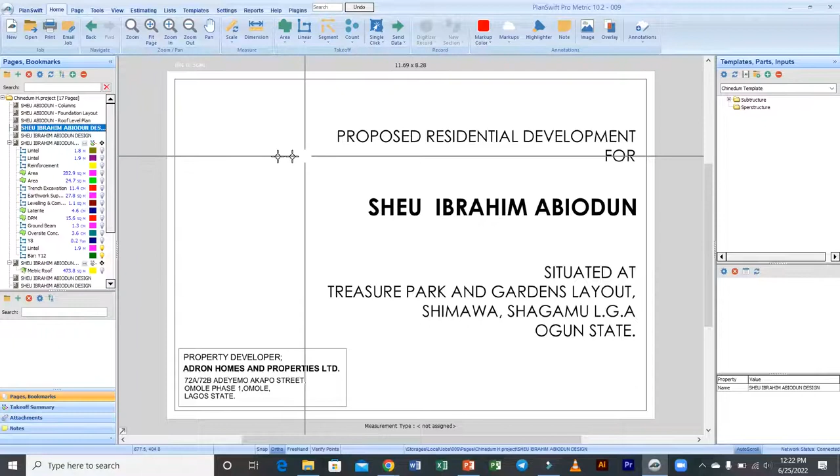This is the interface of the software we're talking about, PlanSwift. If you've used other software, even Microsoft Office, most packages look almost the same. You always have your icon for the software, then home, page, and other tools on the menu bar. I'll explain a few of them and what you can use them for. Since this is the introductory part of the class, I won't go deep into the advanced course.

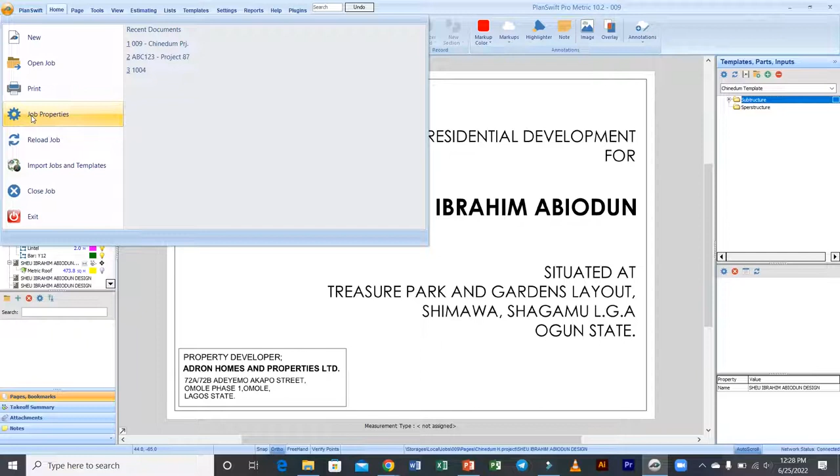So you have Open Job on it. You can print directly if your laptop is plugged into your printer, and you can do some kind of adjustments to your job or to your pages - all of these we're going to go through. We have Reload, we have Close, we have Import Jobs and Templates, and then Exit. We will be playing around with all of these tools in a bit.

Then we'll have PlanSwift. If you want to read anything about PlanSwift, you might not really be interested in this page, but if you want to read anything about the software, this is a page you can come into to see what PlanSwift can do for you and how to do some things. It's saying on this page that Windows 11 remains unsupported for now.

I was actually using Windows 11 on my laptop initially before I had to change it to Windows 10 because Plan Swift was not being supported. So for now, if you have Windows 11, it might be a constraint. I advise from Windows 10 down, you can use Plan Swift very efficiently.

On our home tab on the menu bar, you will have this interface. Each tab you click on the menu bar has other items or tools under them that you can use to work. We'll be basing most of our measurement and taking off on this home bar, relying on it to take measurement of any form.

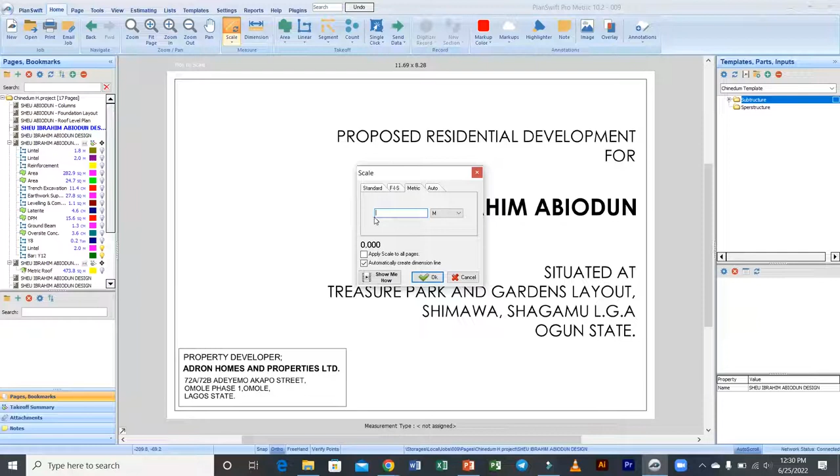Let me show us something briefly. For example, just a minute, okay. I think some persons are on the waiting room. Right? Okay, you'll be allowed in a bit. All right, so let me do something quickly so that we understand what I'm talking about. On this view, let me just say anything. Okay, before I explain what I'm doing, please just...

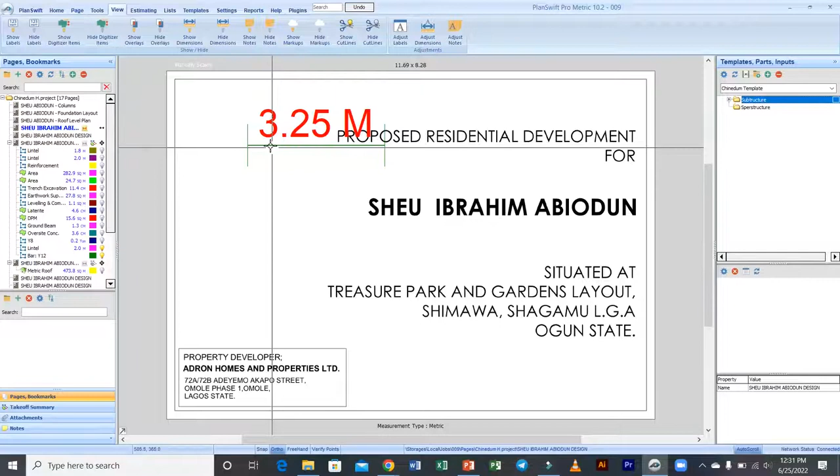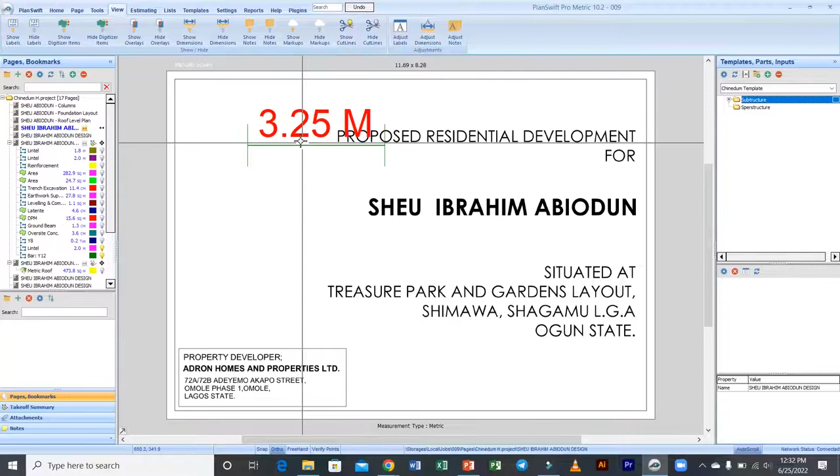Okay, so sometimes you might be taking your measurement. I am on the view tab, please. I wanted to explain something using that view tab. Sometimes you can be on the interface or in a particular drawing and you have measured a lot of things - your lintel, your floor plan, your ties, your wall area for finishings - and everywhere is occupied, and you are being distracted by so many dimensions. So what you can do is use this view tab to get rid of all of these things, but I'll explain that in detail. Please just give me time to explain some of the other things.

All right, we have the estimating tab. So any kind of work you are doing on the home tab comes up in this form. You can see that this estimating tab has our work arranged in a BOQ format. If you look at this place, you have the names of what I have actually done. There is a way I was building, I will explain that when we get to that end, but I just want us to know that yes, on this estimating tab, you can arrange it to be as your BOQ. Or if you want to have it from your report end, there is the report tab.

You can also have them in this form. And if you want to have it on your Excel, there's a place where you can export, a place where you can send in data. Maybe what you want to measure, for example, let's say your skirting, is the only thing you omitted while taking measurement. You can actually measure your skirting from this software and send in data, and then it will reflect on the column of your Excel where it is supposed to be. So this software has the capability of doing that. All right, so again, we have the list - you might not have much thing to do here.

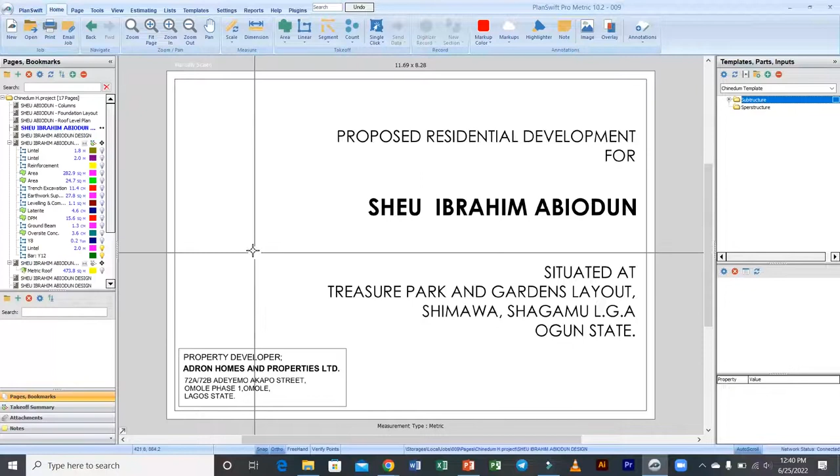So all of that has been incorporated in this software, and you can make adjustments to it. We have your reports for every kind of measurement you are doing. This software accumulates them in a particular place in the form of PDF, so you can export this one. I'll be explaining this also very soon.

Then you have your help button. You might not have much to do there, but for those of us that have installed the PlanSwift software within the week, you will know this is a cracked version. So even if you lose anything, maybe you format your laptop, you can install this software again because it's a cracked version.

As far as you have the correct specs for your laptop, the software will run smoothly on it. The first time I started using this software, I was using a mini laptop, and you know what that can be like, but it was still able to run this software, and I could measure very efficiently on it.

Then we have different plugins. So many of us have always heard about plugins. These are generated or built-in templates that one can use in conjunction with the software. You might have heard about the ADLM plugin. You can use some of these plugins, install them and use them with the software.

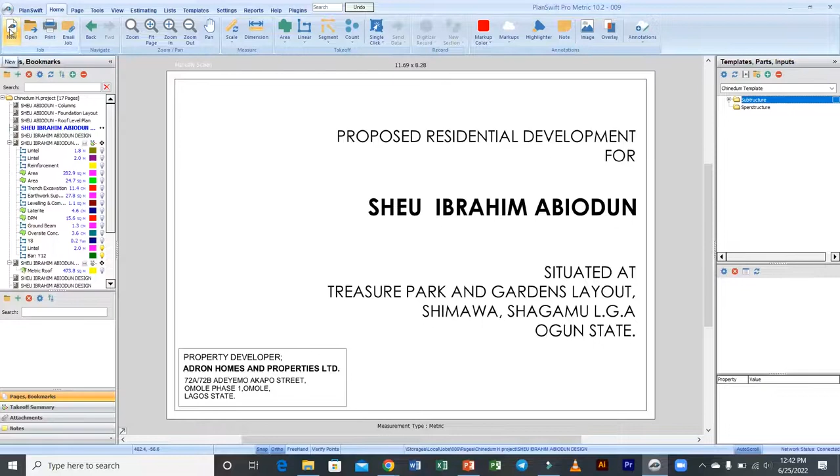Once I click on that, you're going to have this prompt or window asking you the job number or the code. You can name it anything. For example, let me name it ABC123. You can name it anything.

Then the description. For example, let me say I'm taking off for Mr. Kelvin. I don't know if anyone named Kelvin is with us in this call. Okay, Mr. Kelvin. Oh, better still, proposed development for Mr. Kelvin.

So this is the name of the job. You can name yours anything, you know the name of your own drawing. Then if you want to write any notes, that is up to you. Then leave it on local. Leave your new job location on local, meaning you're storing it on your laptop through this software.

Another thing I want to tell you is that anything you are doing on this software is automatically saved. You don't need to press any control key, it's taking care of everything you're doing. It will save your job, even work you did in the past two years, it will still retain those works for you.

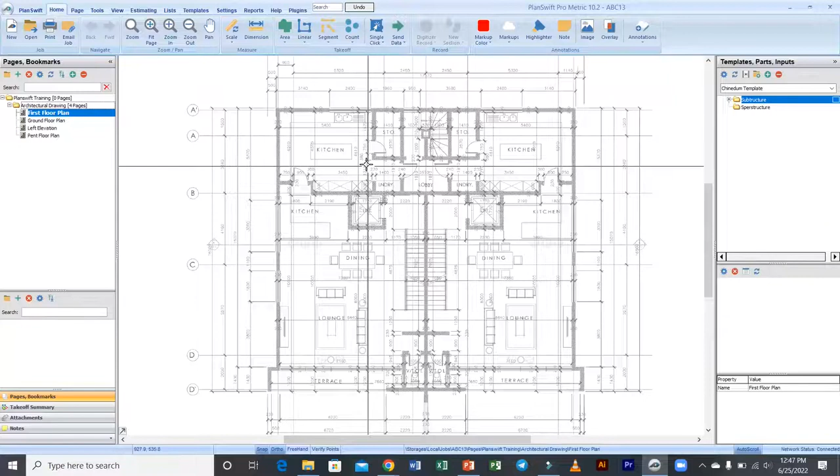Okay, so this drawing is not really clear, this was scanned. Let me use another drawing. Just a minute.

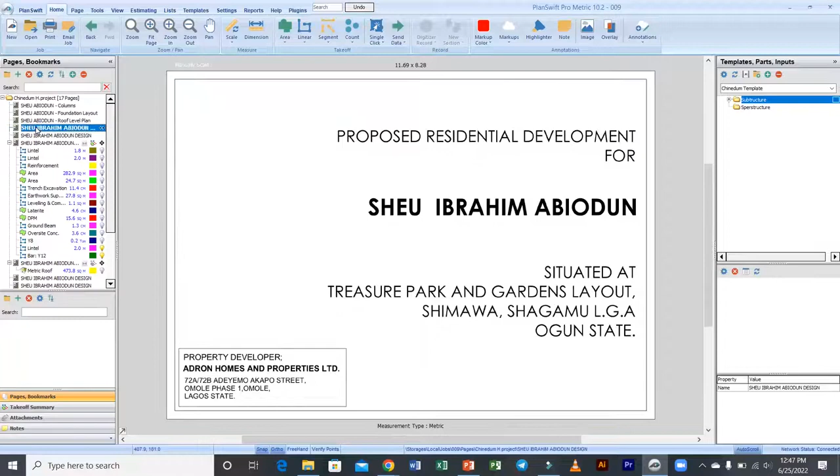Okay, this drawing is clearer. All right, yes, I think we can all see this. So I will use this particular drawing to explain most of the things I want to explain.

So I have been able to upload a drawing on this software, and this is a very good way to do that. So I believe we already know how to do that.

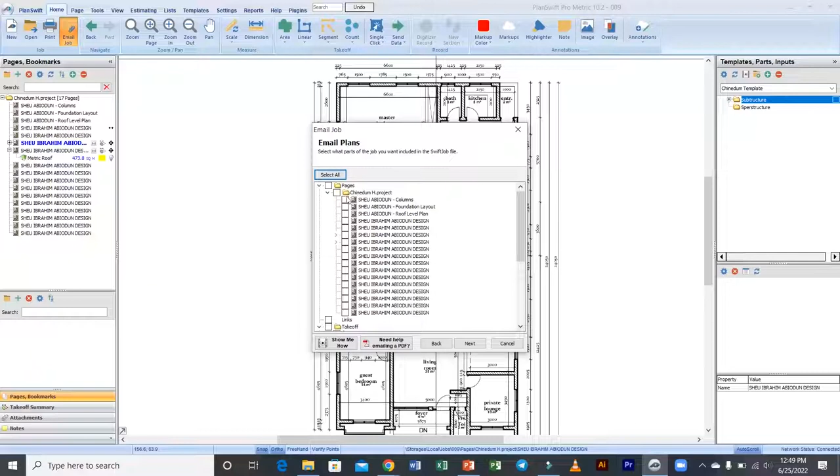So if you click next, it will ask you to click to select the page that you want to send to that person. This is, I'm on my email job toolbar, please.

All right, so you can now write your name, the referral number if you want to do that, then your email address. If you're working in an office and need many persons to see that particular mail and make adjustments, or give their own view on anything you are doing, you can add as many emails as you want and send it.

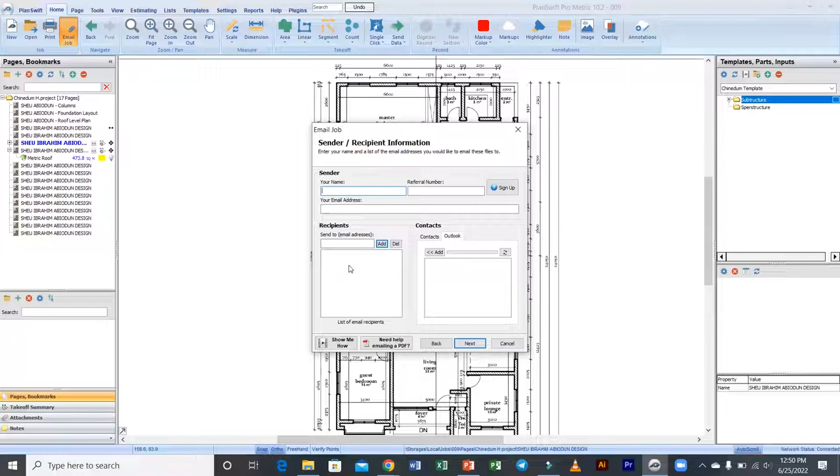So let me close that. Again, we have back, I will explain that in a bit. I will use this very button to explain something. So we have our navigation tool, from this side to this place.

So you can see we have zoom, and this is how you can use zoom. Once you click on zoom, you will see there is this mirror kind of image saying draw zoom box. So if the particular place you want to zoom in or get the details very well is on this master bedroom, from what you can see...

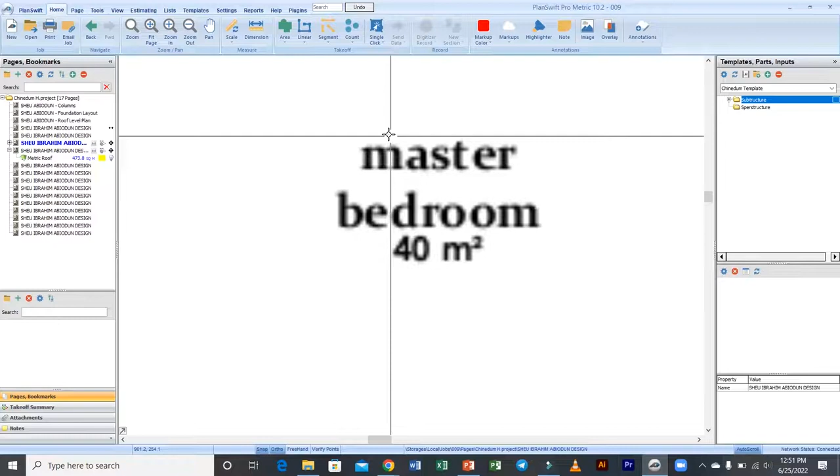Then what you can do is, without using your scroll button - also those are shortcuts, and I will also be telling us about other shortcuts you can use in the course of your measurement - you can actually click, and this is the room you want to zoom. You see that? So you've been able to zoom into this page, but that's not what we want.

So you can click on fit to page to be able to have your default page. Then you can zoom in, you can zoom out, you can pan. Pan is just like holding - this is what is called pan. You can hold your scroll wheel on your mouse and be able to do that also. So if you can't use this one, you can always use your scroll button if you are using an external mouse, right?

So we have the scale and the dimension. This is one of the most important things that you have to know.

If you look at this place, you see that this drawing has been manually scaled. I don't know if you can see that, but this drawing has been manually scaled. All right, so manually scaled.

Before you're able to take measurements of any kind of drawing, you must scale that drawing, or calibrate the drawing, let me use that word too, so we understand it better. You will always calibrate each of the pages you want to work on. But if you've checked your drawing and your details on those pages, and you see that all the drawings are of the same scale, then you can just do one scale and it will work for all the pages.

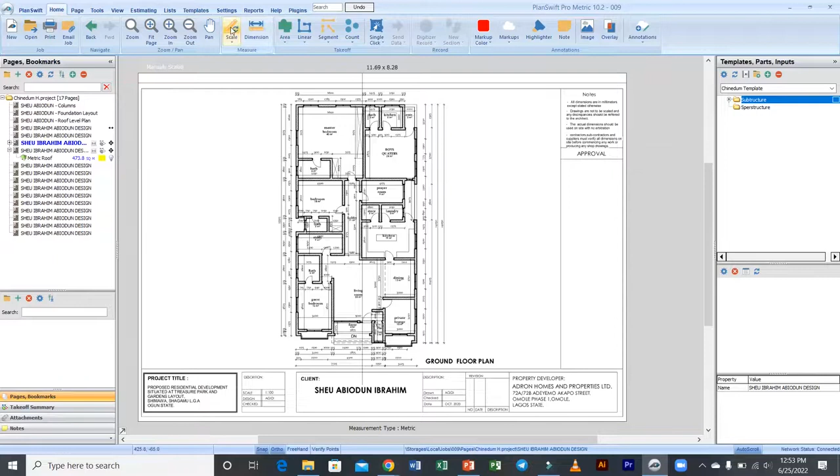But if the drawing, for example, is a photocopy, or sent from a phone to the software, most times it tends to shrink the drawing. For example, any drawing on A4 paper or A3 paper can actually be compressed. So when you bring such drawings, the software has the ability to recognize that changes have been made to this drawing, so you can manually scale it, and I'll show that too so we can see how to do each of these two scaling options.

Then we have the dimension button. Maybe there's a particular place that's not showing very well, so you can click on the dimension button and give it a dimension. For example, let me just use this one as an example, so you can actually do your dimensioning, and then also get rid of it. For now we're not using it, so let me get rid of that.

Now this is where I need you to pay very much attention, please. In these our professions, the truth is that we have different units of measurement. Let me call it units of measurement. Of course we have units of measurement. You have the linear measurement, those are your meter, your millimeter, and the rest of them.

For example, you are taking measurement of your skirting, you want to do anything as it relates to skirting. Whatever you're going to measure is going to be in linear meter.

Another unit we use is our superficial item. We have items that come in superficial form, or area form, let me use that word. So either you call it square measurement or superficial measurement. This superficial measurement is about your area measurement.

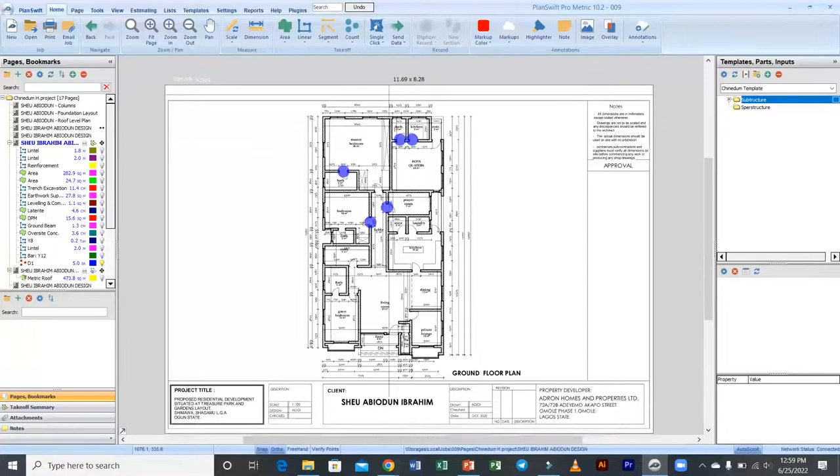So whether the architects have given you a schedule for the door and window, there is a way you can actually do this, and it will be much easier with the use of this software. You don't even need to ask any person any question. So that is how the count tool works. I want to take this off a bit and explain other things.

All right, there's single click. There are ways of using this single click. For example, you have an irregular shape. Some buildings can have not just regular shapes, but there are buildings that come in the form of irregular shapes, and it might be difficult for you to take the area measurement or any form of measurement. So this single click has been built in a way that you can click once on that particular place, and it takes the measurement for the whole of that area.

But it has advantages and disadvantages. One of the disadvantages is that most architectural drawings you will see are very neat, clean, but there are some that come in a form where you have furniture layout everywhere. For those that come with furniture layout, you might be constrained from using this single click, because what it does is recognize anywhere you have a boundary to that drawing. If you have furniture, it will divide it into places. Maybe I'll find a drawing to explain that single click very well.

Then sending data, you can send your data to Excel, just like I explained before. You are measuring maybe your beam, there's this beam you omitted in the course of your measurement or taking off, so you can easily send in the data from this end.

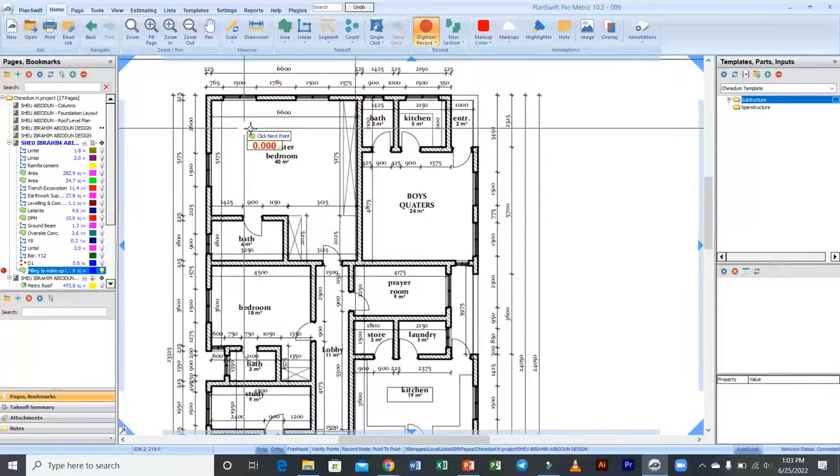For example, I want to take the measurement of filling to makeup level using this laterite for this particular master bedroom. I can always click. This is not really what I want to explain, but I just want to use this to demonstrate before we go into real measurement.

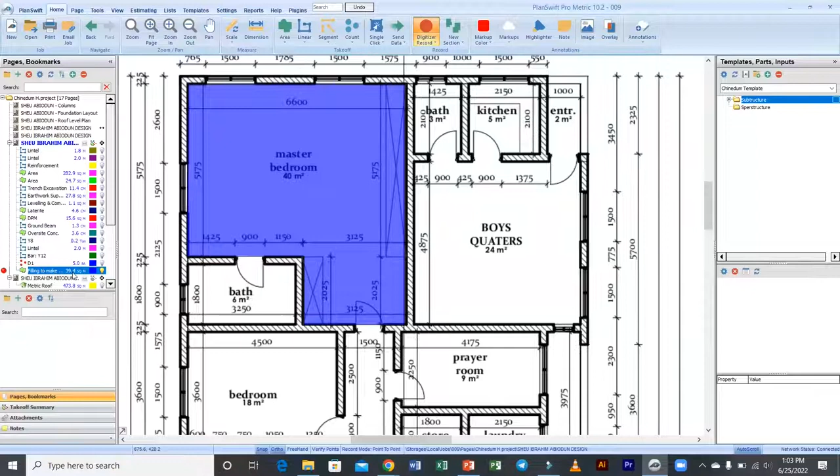Once you click on the last point, you can double click to exit, and at this point you see at the left side of our window we now have filling to makeup level, and it's 39.4 square meter. Once you're done with your measurement, right click and stop.

But the question is this: sometimes we are taking measurement and discover that, for example in screeding, the thickness of our screeding or tiles differs in our wet and dry areas. Our wet areas are places like the kitchen, the bath, the WC areas and all of that. But your dry areas are every other place where you're not using water frequently. So in this kind of situation, you want to differentiate them.

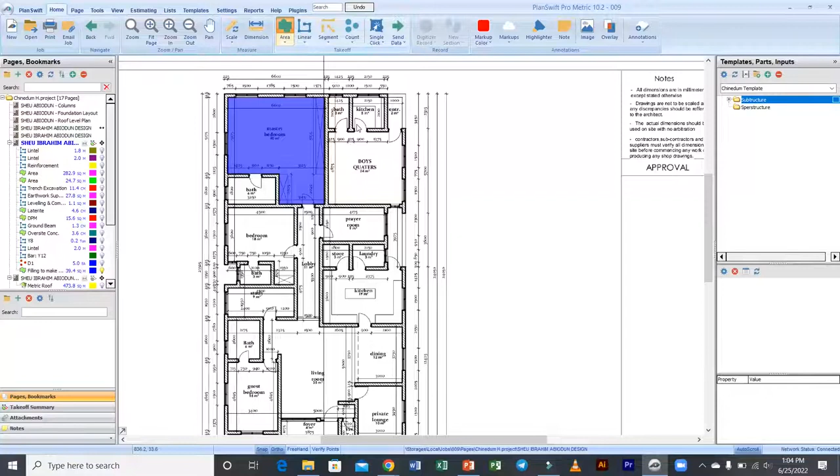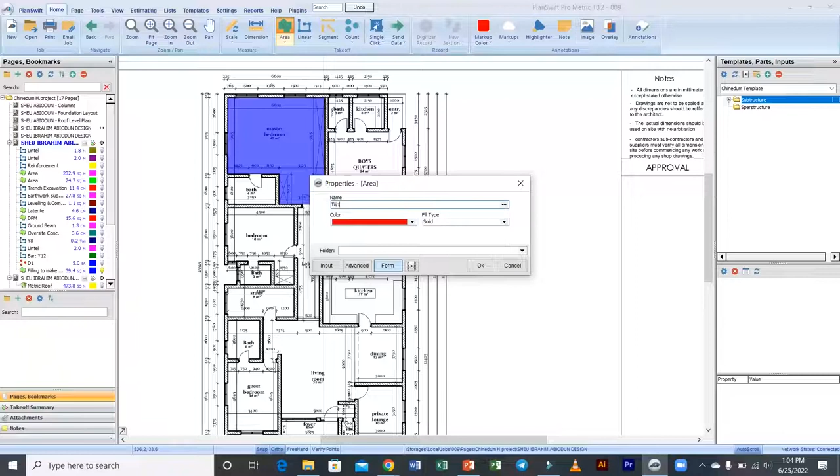If I click on the area again to differentiate that this place is not going to be tiled with, let's say, a vitrified tile, then I differentiate with another color. You can change it again, like I said, to red, to show that you want to measure tiling. So this place is not going to be tiled with the same type of tile as this master bedroom. This place is going to be different.

There's this shortcut I want to use, I'll also be explaining that. There's a place where you can actually magnify and see what you're doing, so you can magnify and see the point at which you are clicking. I'll be explaining all of these.

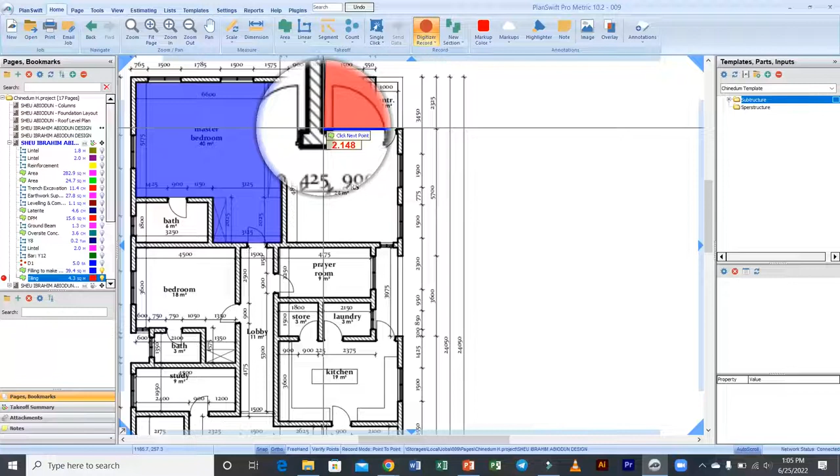Once you click on the last point, you double click. So this place is now 4.3 square meter. That is what you can use. I was trying to explain the digitizer, you can use the area tool to achieve this with the digitizer. That's that for now, I really don't want this.

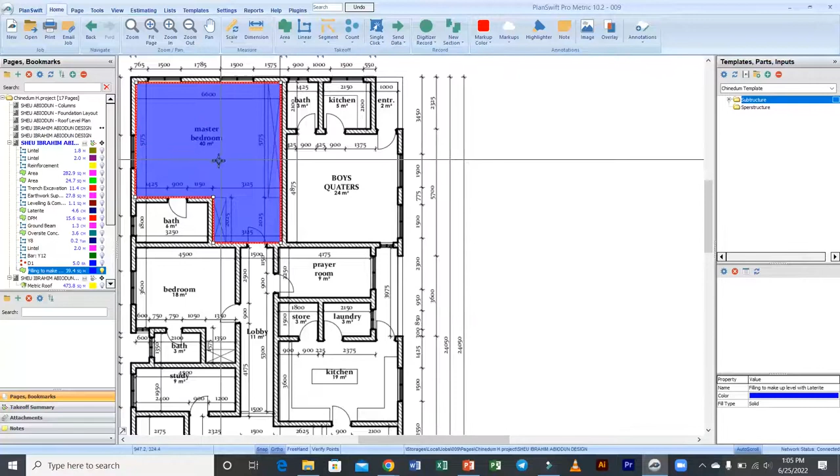Another thing is that you can hover around your measured item to see your measurement. Once you click and come around this place, you can have your measurement. It says filling to makeup level, and there are ways you can manipulate this software to work for you in an easier way.

That is it on our digitizer record, new section, I will explain this new section in a bit. For example, if you're measuring any item of work and want to continue with the same kind of measurement, this place is to be tiled with vitrified tile like I mentioned before. This other place is vitrified too, but you forgot that.

Then you can use new section to continue from here, or you can come to this place and click this. You can see there's a little circular greenish circle around this place, that is the digitizer also. You can click on it to activate it and continue your measurement. We have your markup color for everything you're doing, you can change the color from here. Then you have other markups.

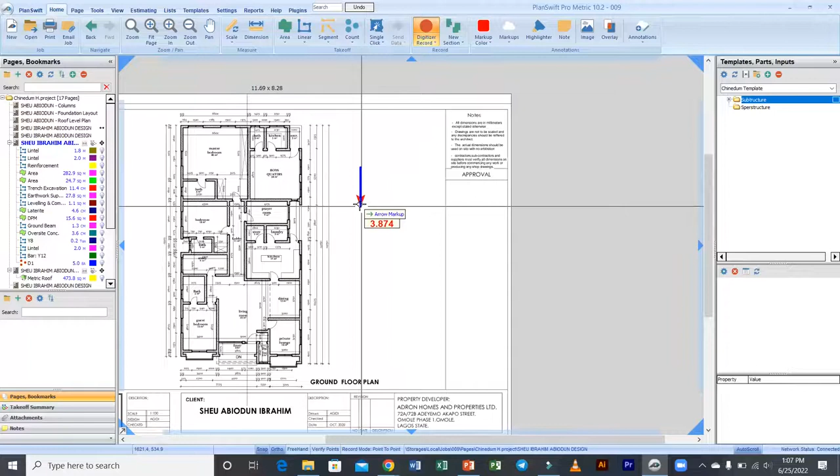I click here to show somebody that this drawing is going towards this side, or towards this side, or maybe this way. So once I click, you can see that the arrow is now showing me that I should look at this place to see every other note that is on this side. So you can always make all of these adjustments.

I just use this one, and then you can highlight some things. You are doing a particular work, and then you discover that maybe in a room there is something you needed to tell somebody when you get back to, so you can close your job, and when you get back to it, you can show the person what you have highlighted. For example, you can use box highlight, maybe leave it this way. I've highlighted this particular room, so that is what you can use this highlight tool to do. That is it on the highlight tool.

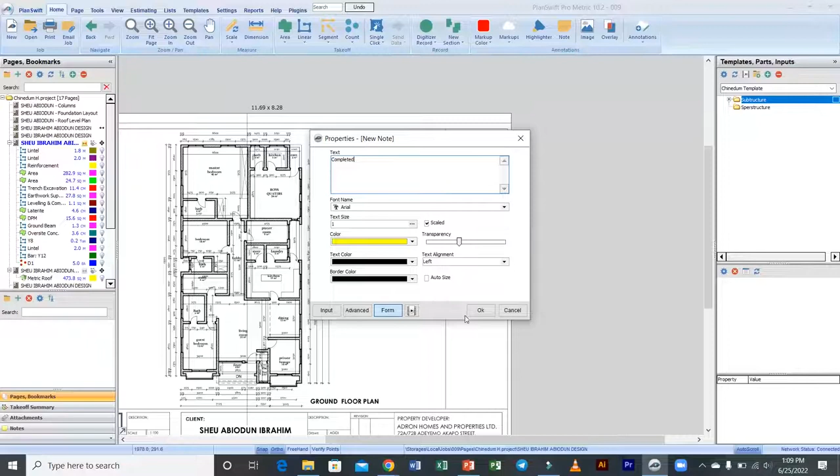Then you can use note also, to show that there's something actually happening on this particular area of my measurement. Once you do that, your drawing is going to be neat and clearer for someone who was not there when you did the measurement to understand what you did. For example, what do I want to write there? Completed, for example. I'll click OK. So I have completed.

So let me adjust. So now I have this. These are the things you can actually do with this software.

Then we'll have image. If you want to upload an image, you have overlay. Let me explain what this overlay can do for you.

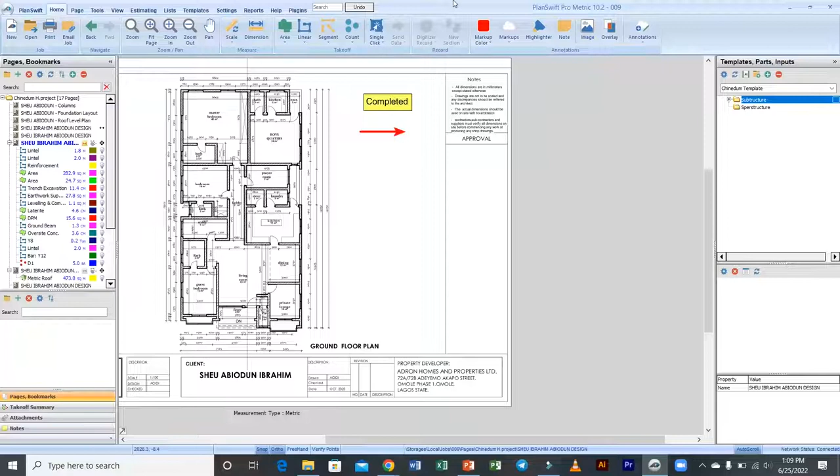Sometimes we are all human beings, and we are bound to make mistakes most times, and an architect is a human being too. So if an architect has made a particular mistake that affected the project, and you are expecting the architect to give you feedback on the adjustment, you send back this drawing again, and the architect has been able to work on it and send back the drawing, and you want to see the difference between the two. You want to compare the two drawings and see the adjustment that you've made. What are the differences between these two things? Maybe this rectangular living room is now circular, or maybe it has been made into a square. You will be able to see that this software can recognize that yes, there is something actually that has been adjusted in this particular place.

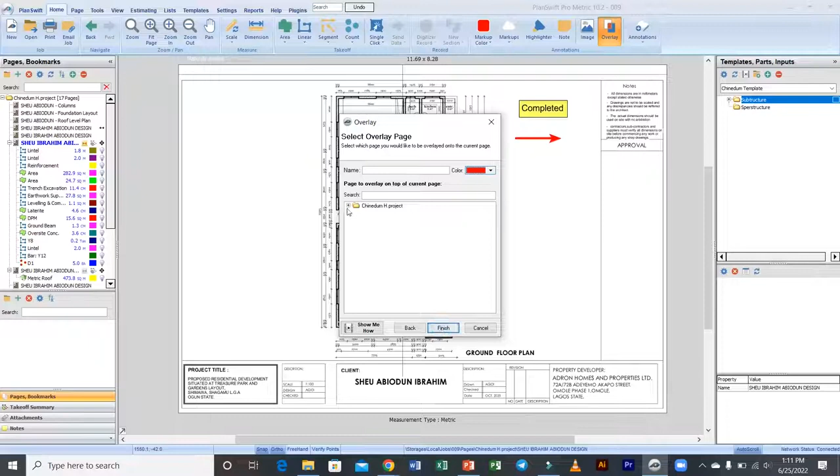Okay, let me just do that in a bit. I click on overlay. What I want to do is standard overlay. So I click next, and I choose my folder. Which of the page is that again? I think it's this one. So I click on this.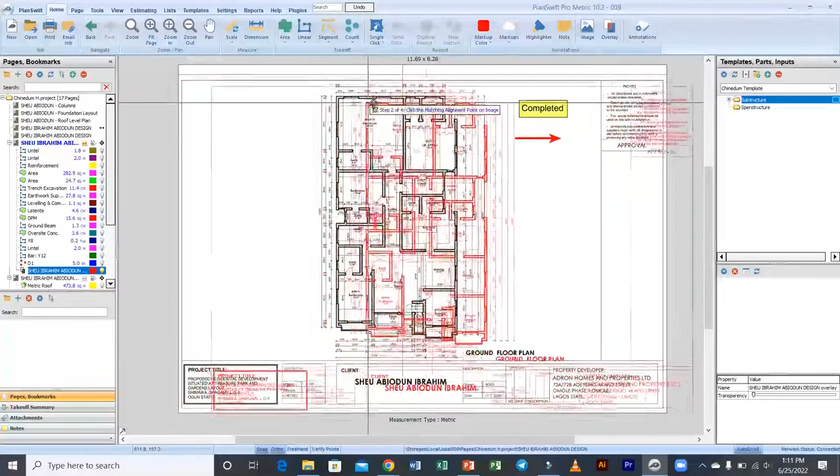But if I click on any of this side, you will see, I don't know if you are seeing any difference now. You can now see that this drawing was actually merged, and because there was no difference between the two drawings, you can now see that this software has been able to know that there is no adjustment to it. So that is one of the things you can do with this software.

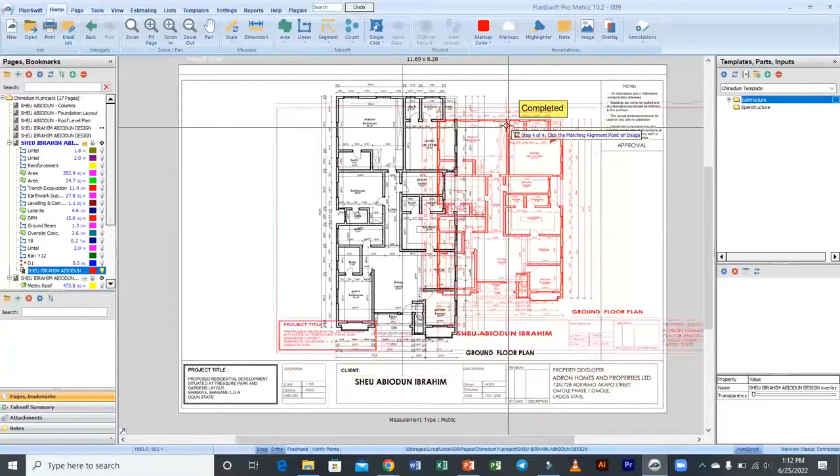Okay, now we have annotation, we have your revision cloud, you have your rubber stamp. For example, if you want to stamp your drawing and it's non-approved, or you want to show somebody that this drawing has been approved, you can actually use all of these annotations to do that.

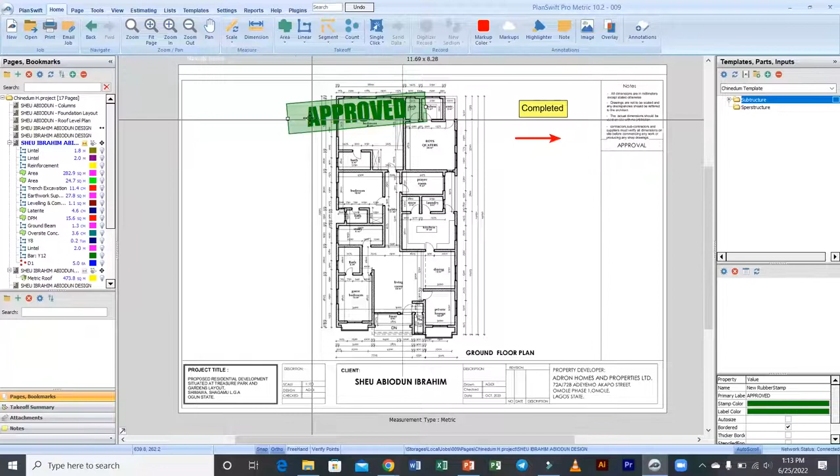All right, so that is it. You should be able to know that I've been able to explain so many things, if you look at that content. The only thing I've not been able to do now is maybe take a wide number of measurements, or take measurement in a regular pattern, to show us what this software can do for us.

But you've also been able to know that structural drawings are not on this particular drawing, and there are things you can do with this software using structural drawings. For the sake of this first part of the training, we will not be going into that. If you really want to get the best out of it and understand how it works, join us in the forthcoming training, which will be communicated via the group chat.

All right, so I've literally explained almost everything on the interface. If you look at this text bar, under this place there is snap, there's ortho, there's freehand, there's verify point. All of these you can use to your own advantage while taking measurement.

All right, so I've been able to upload a drawing, I've been able to scale the drawing, and I gave you two options through which you can scale your drawing. I made mention of auto scaling and manual scaling.

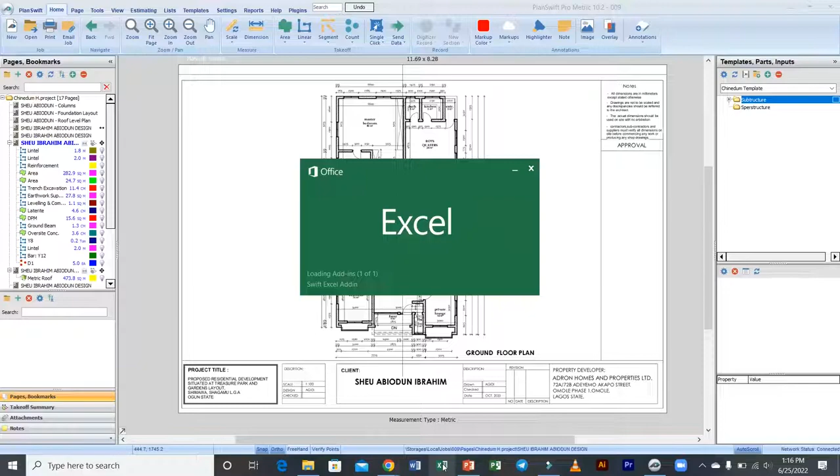I don't know if I've been able to tell you, for example, I want to launch my Excel. If you've installed this software, you will notice—those of us who installed it newly might not notice this—but let me open my Excel and show you something real quick. If you have your Excel loaded just like mine, by default on your Excel you're going to see on the menu bar PlanSwift somewhere.

If you have your PlanSwift installed already, go to your Excel, you see that there is PlanSwift in this place. When you click on it, you can actually connect. There are so many things you can do with this—you can connect your Excel to your PlanSwift, you can unlink it.

Again, if you come back to home, if you click on any of the cells, you can right click and you see PlanSwift also. So maybe it's area measurement you want to do, you can also do that. This is one of the things we'll go into—the advanced form of this course will show us how to measure volumetric items using the linear tool.

If you check the course content, it's part of the things I'll be doing—I'll show you how to measure volumetric items, mostly concrete, how to take care of your concrete works and all of that. Let me quickly go back to the software interface. All right, so that is that for now. I believe we have one or two questions to ask.

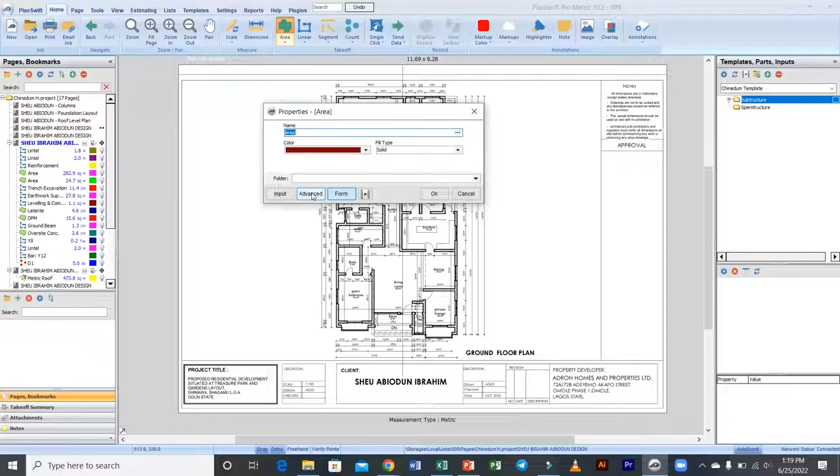I'm going to be showing you advanced features. You can see that anytime you click on each of these measurement tools - let me click OK. Anytime you click on any of these measurement tools, you're going to have this prompt, and this window that pops up has an advanced option. If you click on it, you're going to see so many things. There's a lot to learn when it comes to this software, and you can't afford to miss it.

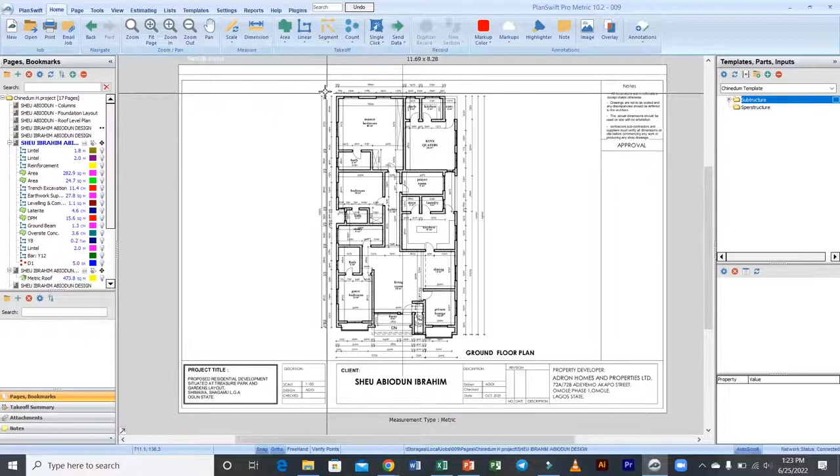Okay, no problem, we really understand this tutorial. We are appreciating, thank you so much sir. Thank you so much, may God bless you. And bless you.